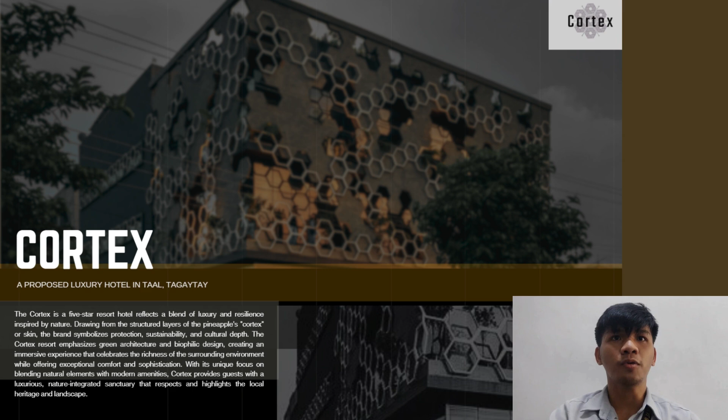R32S1. Cortex, a proposed 5-star luxury resort in Tagaytay. The Cortex is a 5-star resort hotel that reflects a blend of luxury and resilience. Inspired by nature, drawing from the structure layers of the pineapple's cortex or skin, the brand symbolizes protection, sustainability, and

cultural depth. The Cortex Resort emphasizes green architecture and biophilic design, creating an immersive experience that celebrates the richness of the surrounding environment while offering exceptional comfort and sophistication with its unique focus on blending natural elements with modern amenities. Cortex provides guests with a luxurious nature-integrated sanctuary that respects and highlights the local heritage and landscape.

Concept: the Pilipinyahan luxury hotel concept weaves biophilic architecture into a design that celebrates Philippine heritage and Tagaytay's natural beauty. The facade, featuring a hexagonal pineapple skin texture, symbolizes local culture and offers natural weather resistance. Lush landscaping with tropical flora and pineapple plants surrounds the property, enhancing guest connection to the environment.

A farm-to-table dining experience highlighting locally sourced pineapple-based dishes immerses guests in the region's agricultural legacy. This nature-integrated design creates a luxurious, sustainable retreat that fosters well-being and a deep connection to the surrounding landscape.

The evolution of form. Number 1, starting with a base block, and second, the building is then divided according to different function and size. Addition and subtraction of volumes, and number 4, playing with levels for the final form.

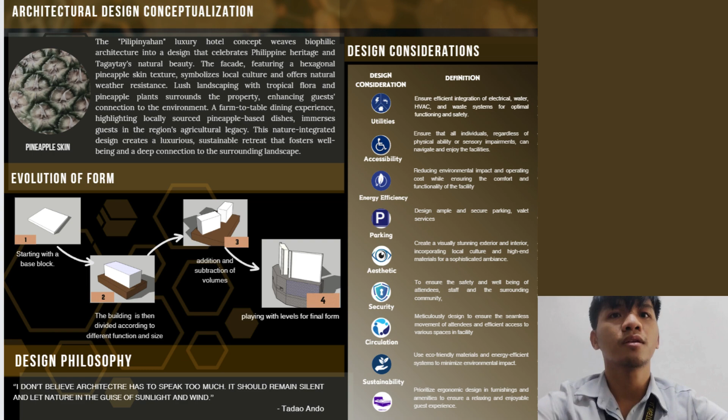And my design considerations are utilities, accessibility, energy efficiency, parking, aesthetic, security, circulation, sustainability, and comfort. Next is the site development plan.

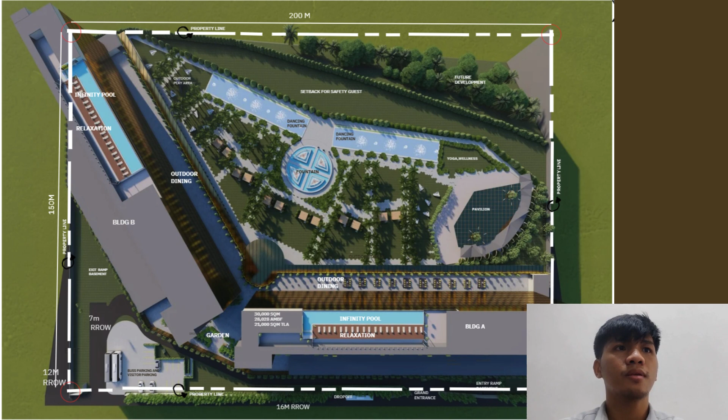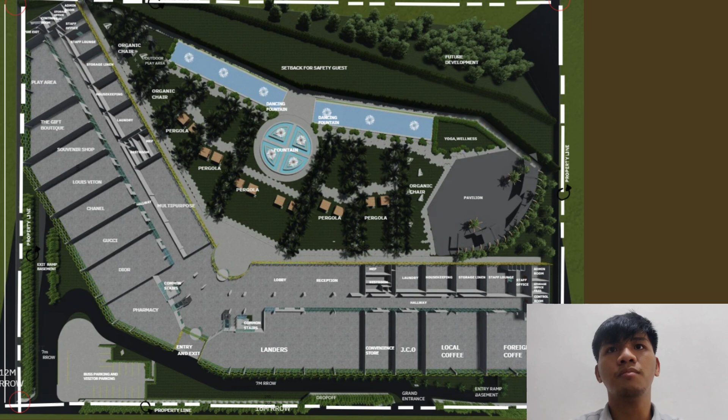And going to building B, this is my commercial area: the gift boutique, souvenir shop, Louis Vuitton, Chanel, Gucci, Dior. And the restroom, laundry, housekeeping, linen storage, staff lounge, staff office, staff control room, office files storage, and admin are the same as in building A. But the difference is the multipurpose hall.

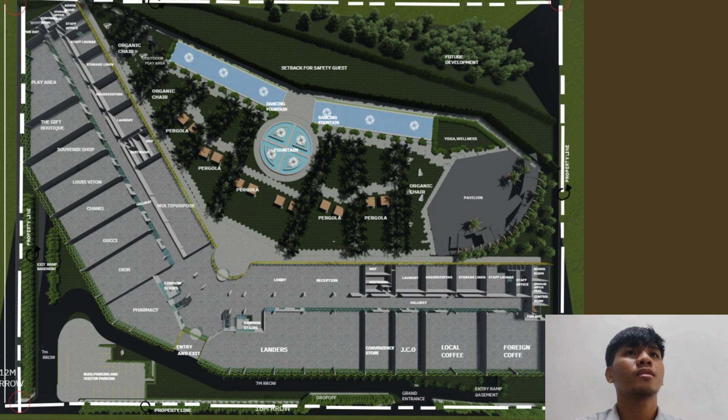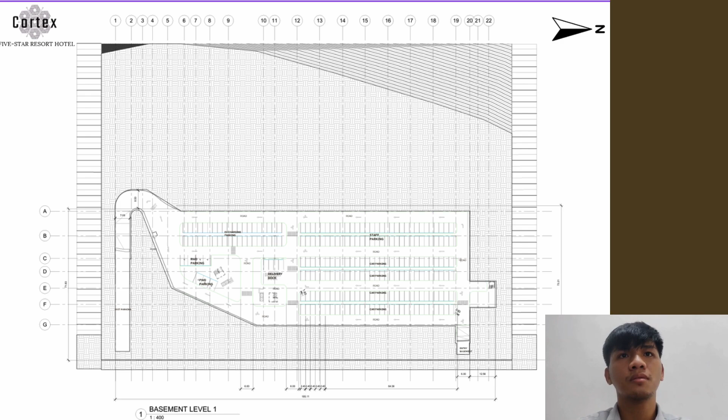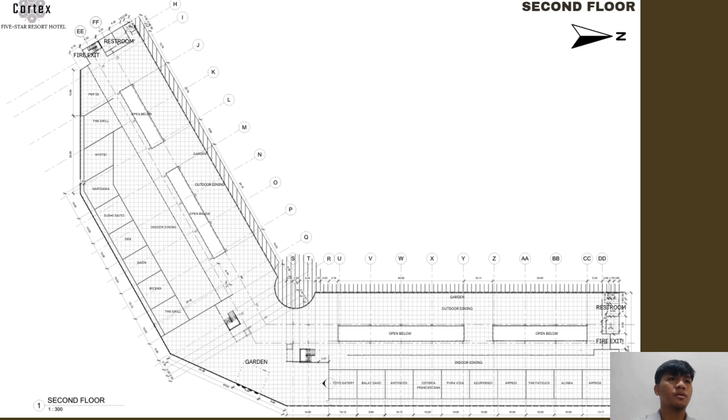Next is the unit, the deluxe room. The deluxe rooms are 20 units per floor, from the third to fourth floor, and the fifth floor is the same deluxe room. And my floor plan,

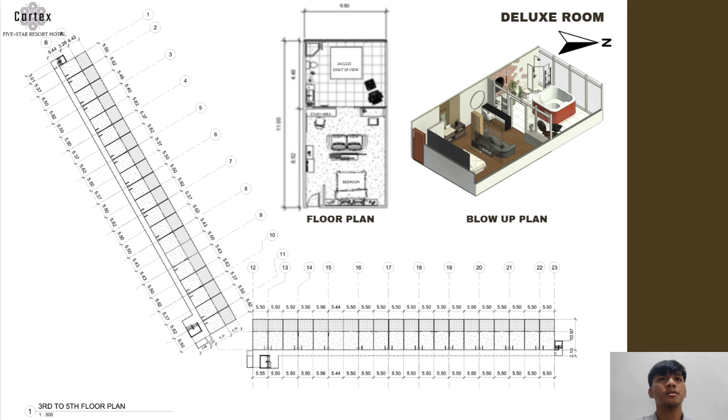Next is the suites room. From the 6th floor to the 9th floor, there are 20 units per floor, for a total of 80 suite units from the 6th to 9th floor. And this is my floor plan.

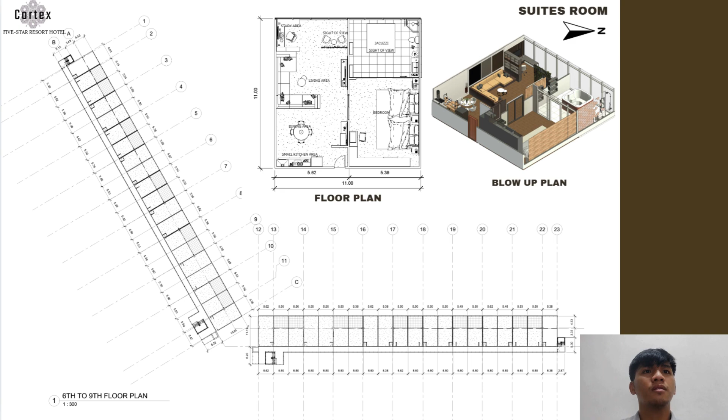And this is my blow-up plan. Next is the roof deck, from building B.

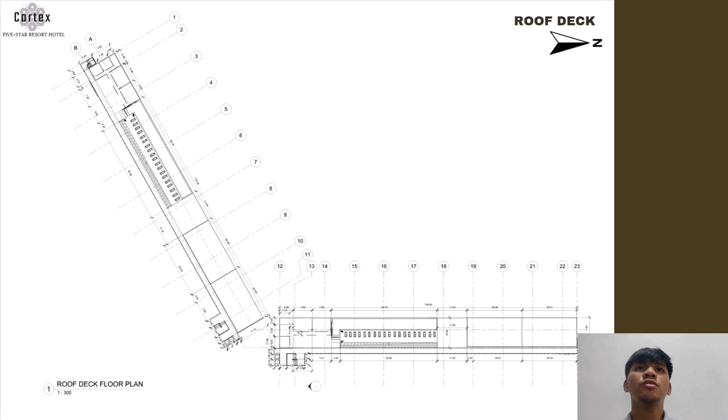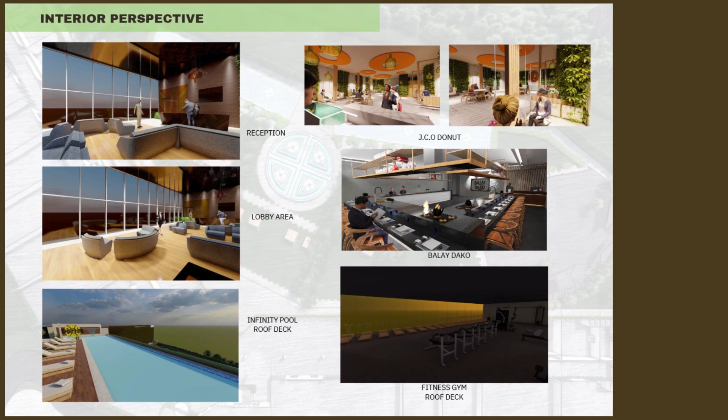Next is my interior perspective. Lastly is the exterior perspective.